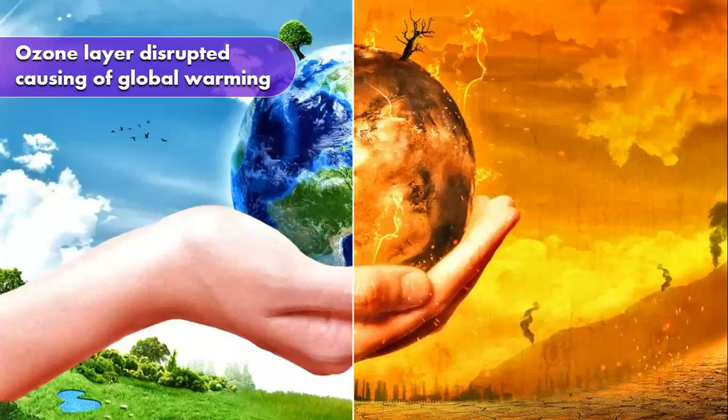We know that the present energy sources which are there in the world are creating a lot of damage and harm to the environment. One of the major effects is that the ozone layer has been depleted, and as all of us know, the ozone layer helps to block ultraviolet rays from the sun. The ozone layer has depleted because of the gases and pollution taking place. Global warming, very good Navleen beta.

Global warming is also increasing. Big glaciers in Antarctica are melting. Sea levels are rising. There are a lot of issues with the present fuels that we are using.

Tell me, which kind of fuels are we using now? Today in the world, which form of fuels are being used? They are called as fossil fuels. Very good, very good. Coal, petrol, diesel, natural gas, everything is collectively called as fossil fuels.

And when there are so many advantages of fossil fuels, we don't deny, but a major drawback is, first, they are very expensive, and second, they are exhaustible, meaning they will get finished. They are pollution causing, they are exhaustible, not inexhaustible, meaning they are non-renewable in that sense. So these conventional energy sources are not reliable for the future generation. The cost factor is also there, it's very expensive. And last but not the least, as they are non-renewable energy sources, as we keep on consuming and using them, we are depleting the existing stock.

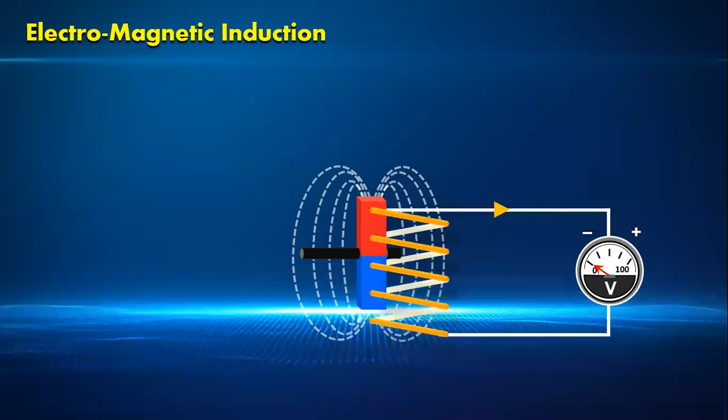What is this device? This device, what you see in front of you, is the voltmeter, meaning it is producing electricity. Very good. Now, obviously, manually no one can rotate this 24/7, because we are humans, we are bound to get tired. Hence, correct, it should be an ammeter, very good beta, to measure current. But it is also measuring the potential difference, it is just telling us how much potential difference is coming. It is understood current will also be there.

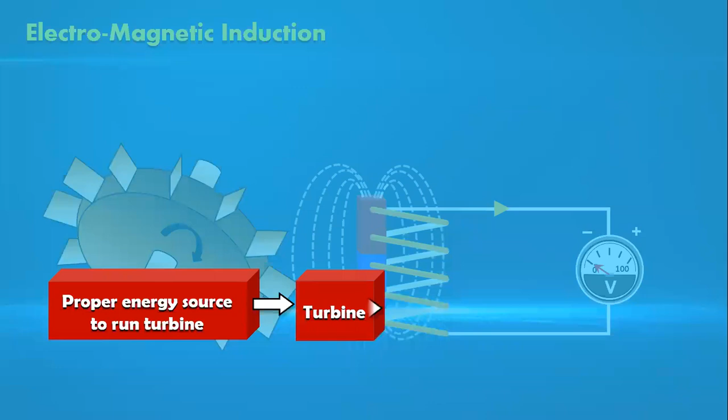Very good. So these turbines over there, obviously the flow chart, the idea is there should be some energy source to run the turbines, because rotating the turbines is important. Those turbines, once they start rotating, are connected to the generator, and once the generator starts, the electrical energy will be produced.

Now they have discussed in the first part of the chapter the thermal power plant. My aim is not to teach you the thermal power plant, we don't need to discuss that, you know everything. Tell me, this turbine which is there, which they have shown in this drawing in front of you, is this a gas turbine or is it a steam turbine?

Wonderful, wonderful. It is a steam turbine. Very good, very good. Tell me, what is the function of the boiler?

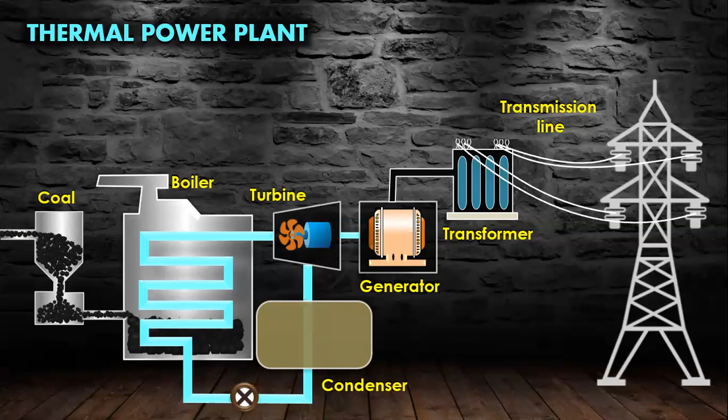What does the boiler do? It converts dash to dash. Very good, Madhura beta. It converts water into steam.

Very good, very good. So when will water get converted into steam? When it starts boiling, correct. When it crosses 100 degrees Celsius. Very good. So the moment it crosses 100 degrees Celsius, it starts boiling.

Steam will form. So this water gets heated because of that coal which is used as a fuel. And then that steam is produced, that steam is released on the turbine with full force. Turbine starts rotating, it goes into the generator, and inside the generator the coil rotates.

See, the coil can also rotate or the magnet can also rotate. Please remember, inside the generator, normally the magnets are stationary and the coil is rotating. So the transformers are connected and from the transmission line, it goes all the way to the cities.

What does the condenser do? It converts the steam back to water. Very good, very good. The steam enters into the condenser and the condenser is of course connected to some cooling tower.

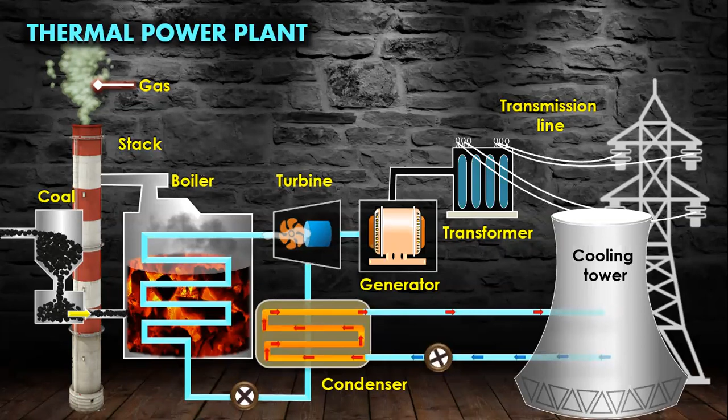Because the water is getting heated. Very good. How is that water getting heated? Why is the water in the condenser's pipes getting hot? By the steam, by the steam. Very good. The steam is falling on it. The condenser is absorbing that heat from the steam.

If the heat reduces from the steam, it will convert into water, and that hot water goes back to the cooling tower, where it gets cooled, and then it comes back again. So this way, the condenser converts steam to water.

Is the condenser opposite in function to the boiler? Tell me please, is the condenser opposite in function to the boiler? Yes, it works opposite.

Very good, very good. So this is the schematic drawing. If you haven't made so many things in the exam, they don't ask you to make such things. This drawing doesn't come, but you should remember the flow chart, the schematic drawing. This is called a schematic drawing.

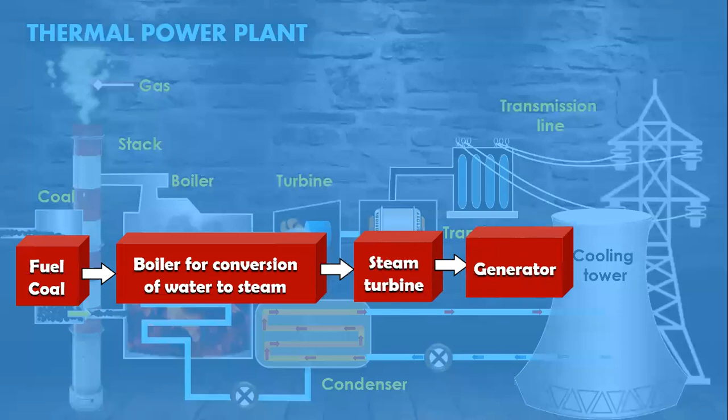The fuel, the coal, goes to the boiler for conversion of water into steam. From there, steam is released onto the steam turbine, which is then connected to the generator, and ultimately from the generator you get electrical energy. This is the whole process without drawing the actual thing. This is a flow chart.

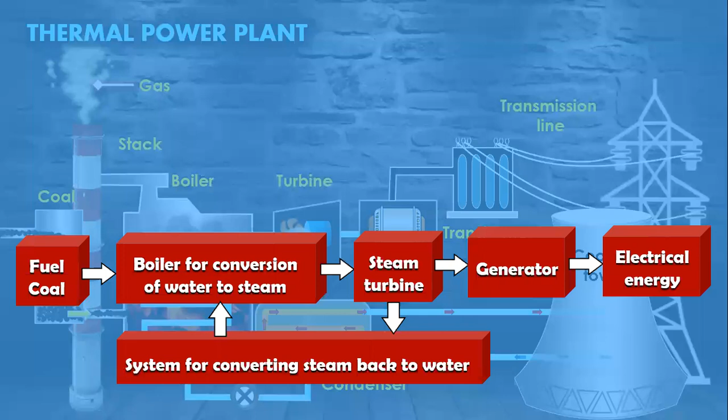Now comes the energy flow chart. This is more important, I would say. Please remember this energy flow chart properly for every power plant. Every power plant which we are going to discuss, whether it is thermal, gas, nuclear, or hydroelectric, every power plant has an energy flow chart also.

So there is chemical energy in the coal. Tell me, this chemical energy of the coal is converted to dash energy. Quickly, quickly. It is converted to thermal energy, brilliant, brilliant. Thermal energy is converted to dash energy - thermal energy into kinetic energy of steam. Very good, very good, into kinetic energy of steam. Kinetic energy of steam is converted to dash.

KE of turbines converted to electrical energy. Very good, very good.

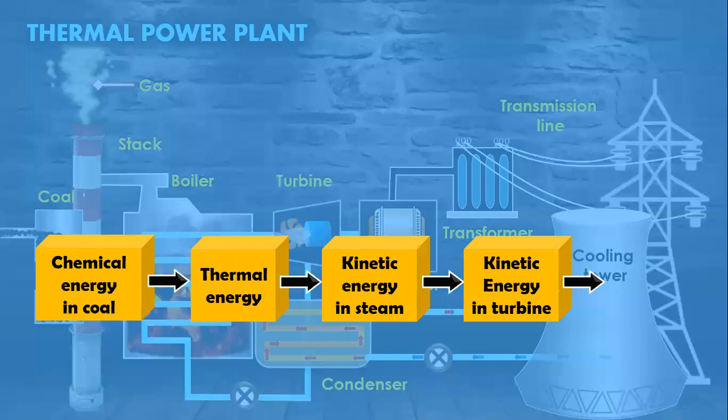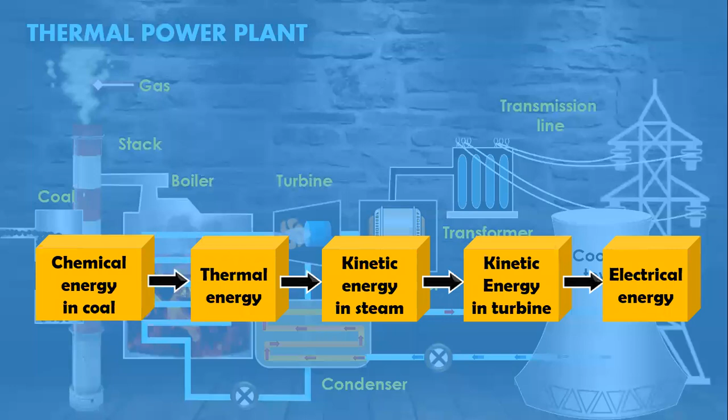You all are answering very promptly in the chat box. It shows you are thoroughly prepared, you've seen the modules, done good pre-work. This benefits both of us - you all are able to answer nicely, and I am also able to go a little quickly. Thank you so much for watching at home.

Okay, so this was the thermal power plant. But thermal power plants have drawbacks - it's a big problem. We are using it, we don't deny that. For so many years, thermal power plants have been used in every country in the world. But unfortunately, after 5-6 decades of such heavy use, today we are victims of pollution.

And because of that, there are a lot of other issues going on. If you see programs on TV, especially channels like BBC Earth or Nat Geo, there is global warming, the glaciers are melting in Antarctica, sea levels are rising, and fewer crops are growing in the world.

It's a big problem. You all are the younger generation. In the next 30-40 years, the world is for you. So at your end, you should try your best in whatever ways to reduce the effects of this thing.

But pollution is the main issue, obviously. Today asthma and so many issues are there. I feel this mask should be worn all the time, even after all this COVID jhanjat gets over. Wear a mask - you are going out on the road, you don't know how much pollution is there. So it's a big headache.

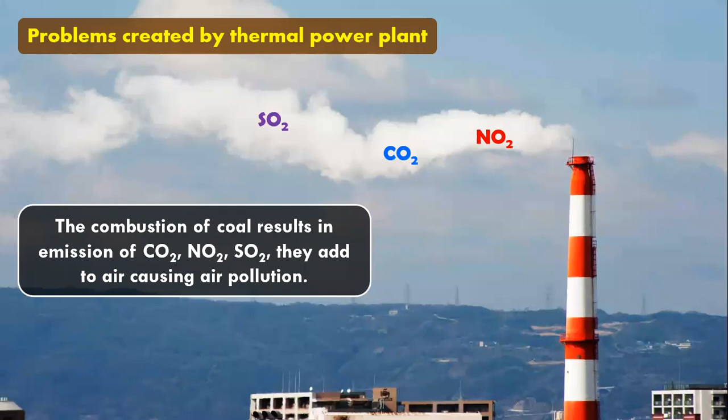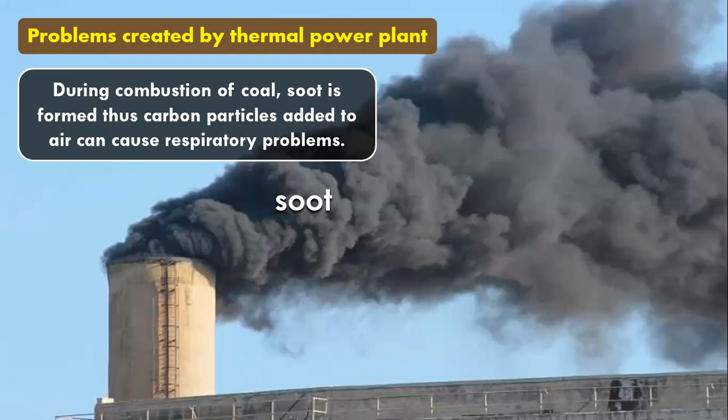Okay, so these gases are there in the atmosphere. At the same time, because of these gases, that black color smoke that you see is called soot. You must have seen photos from villages - they have that chula where they put wood, and when they burn that wood, the burning makes their utensils black, and the walls of the house also turn black. So this is called soot.

And last but not the least, there is depletion in the coal reserves. No doubt, we are exhausting it. In the last 50-60 years, so much coal has been used that wasn't used even in the 200 years before that. Scientists have seen that in the last 60 years - let's say we are in 2021, so the last 60 years would be from 1961. Between 1961 and 2021, so much coal has been used. Why do we use coal? Mostly to generate electricity, and it is also used in industries, especially steel industries.

Especially in the steel industries and iron industries, this coal is being used so much around the world that scientists calculate that between 1761 and 1961, in those 200 years, less coal was used, but between 1961 and 2021, in those 60 years, more coal has been used. So this is another problem which is there.

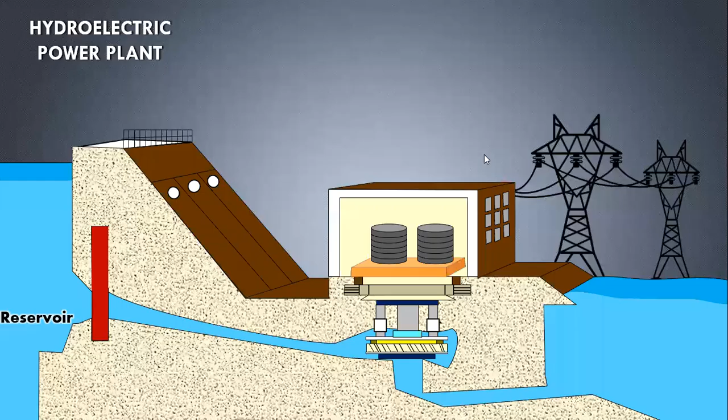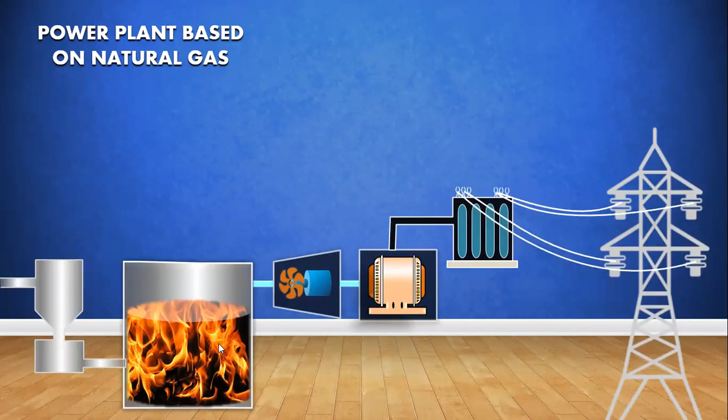So this was about thermal energy. Moving on to the next power plant which has been discussed is the power plant based on natural gas. Interestingly, India is encouraging these type of power plants. The government encourages these power plants in India and gives incentives to big industries that if they want to install a power plant, they should install a natural gas power plant. Why is the government promoting these natural gas power plants?

It's because these reserves are there in India also - not because of the pollution. These reserves are available abundantly in India. You have heard about CNG, compressed natural gas, to reduce imports.

Very good. Because when you buy from abroad, you have to pay in dollars, and when you pay in dollars, that becomes expensive for us. So that is the reason the government is encouraging this. Today you see mostly almost every rickshaw in our area is working on CNG.

Every rickshaw in our area is moving on CNG. Taxi drivers also run their taxis on CNG. You must have seen how big it is inside the trunk - have you seen a big gas cylinder is there? Have you noticed in these taxis, inside the trunk? Even now people are having this in their personal cars - yeah, red and white type.

So natural gas also has power plants. In natural gas, there is a combustion chamber, there is a gas turbine. See, this is the second turbine. First was steam turbine, second is this time it's a gas turbine. Everything else is more or less the same.

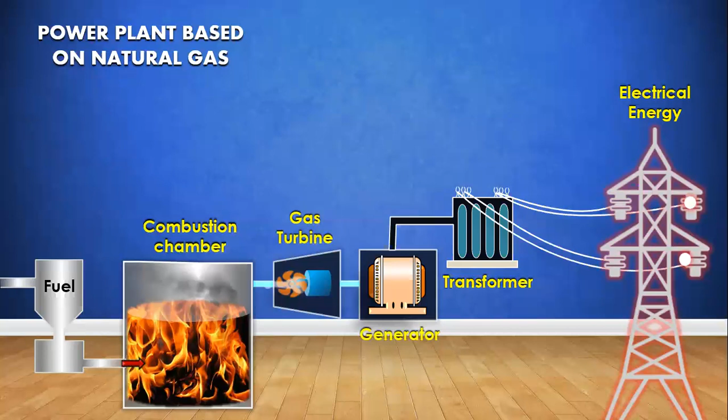Nothing complicated. Now, why is there no condenser in this? Because no water is there. Very good - water is not being used, steam is not being formed. When there is no steam, we don't want it to come back to water. So when there is no water involved, we don't use a condenser. Very good, simple policy - wherever water is involved in a thermal power plant, there we use a condenser.

So this is the flow chart in front of you about the schematic drawing of this particular power plant. Did you understand?

Okay, now this is the discussion of nuclear fission. In nuclear fission, which material, which radioactive element is used? Please tell me - in nuclear fission, you have to tell with the number. What number is uranium? Uranium has many isotopes - Uranium 235, very good, Uranium 235.

Tell me, true or false: in nuclear fission, the atom of uranium is split into two parts. True or false? It is not a true statement, it is false. Why is it false? Because the atom is not split.

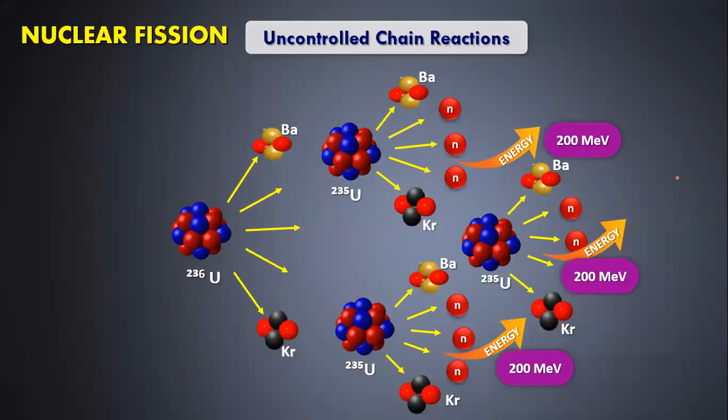So we need to slow it down. Which rods? Boron, and there's one more rod too. Boron and cadmium. What is special about them?

What is the special thing about them? Why are they so special? They absorb the neutrons - if not all, most of the neutrons.

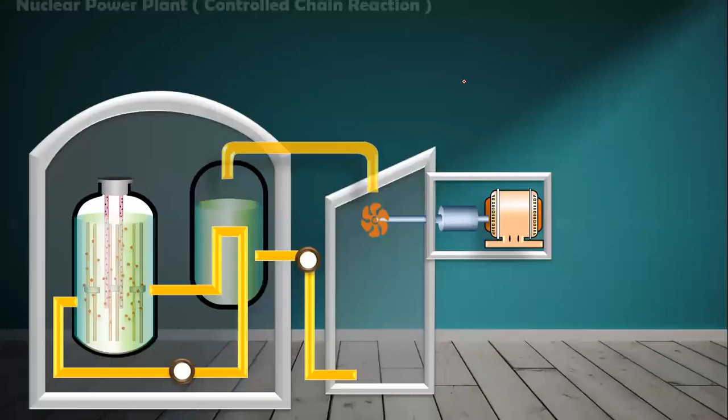And when they absorb the neutrons, very few neutrons will be permitted to carry on forward, and in this way the speed of the reaction will reduce a bit, and when it reduces, this becomes a controlled chain reaction. Very good. Now controlled chain reaction is used in a nuclear power plant.

This is there in front of you. There is a nuclear reactor, a boiler, everything is the same. Here there is water. Will there be a condenser here? Yes, because water is there. Inside that boiler, you can see there is water. So a condenser setup is also there.

There's a turbine, a generator, everything is there. Now that nuclear reactor, which is on the extreme left, that nuclear reactor actually includes 3 sub-parts. The nuclear reactor has a moderator, it has the fuel rods - meaning uranium, and it also has the boron or cadmium rods. Each one of them has its own role to play.

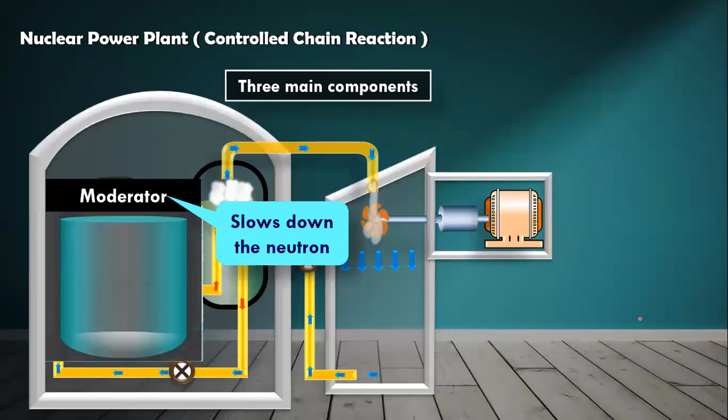Inside the nuclear reactor, there is a moderator. It slows down - moderate means to balance it a bit, slow it down a bit. It was very fast, so it was slowed down a little, so that the reaction can take place properly.

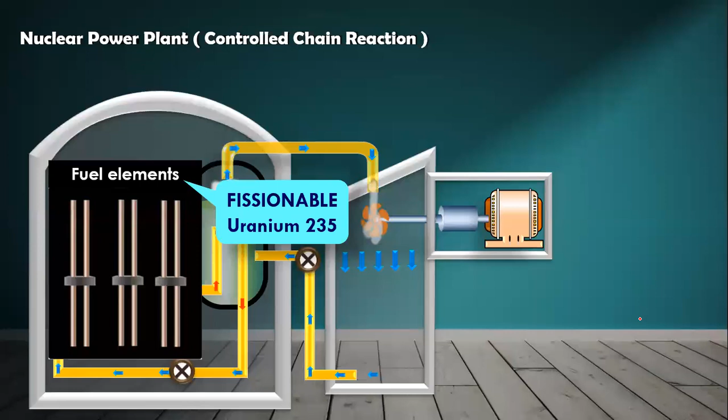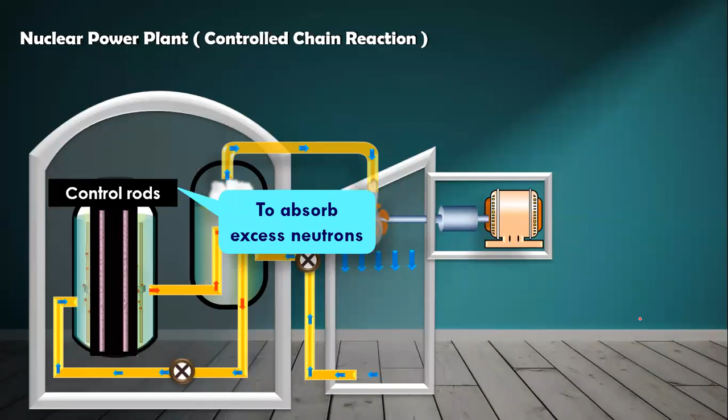Then is the fuel element which is fissionable - what is going to break - that is uranium-235, what is going to split. And then there are the control rods, you know the name - control rods include boron and cadmium. So these are the control rods over here.

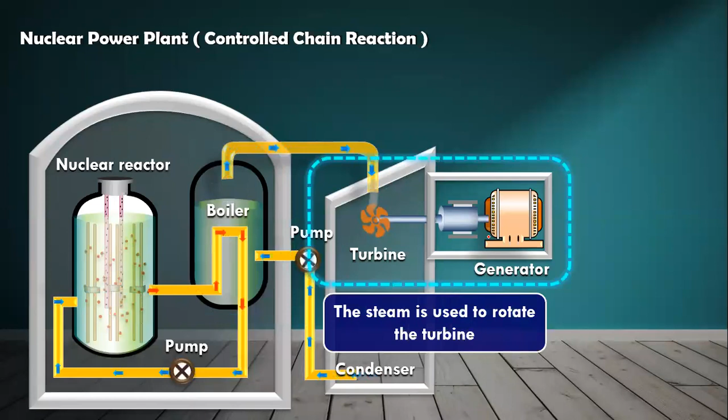Now, after that is the boiler. You know the story, I'm not going into the boiler, I'm passing on quickly. The boiler heats the water, steam is formed. Steam goes into the turbines. Turbines will rotate. The moment the turbine starts rotating, the armature coil in the generator will start rotating, which is between the two magnets. Remember, the armature coil rotates, the magnets stay in their place, they don't move, so the armature coil also rotates and ultimately electricity is produced.

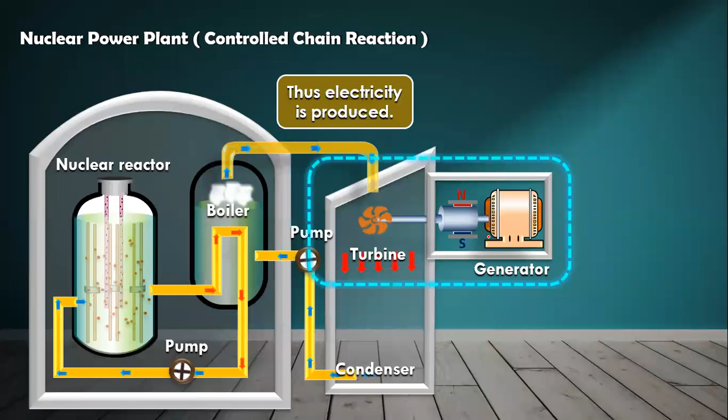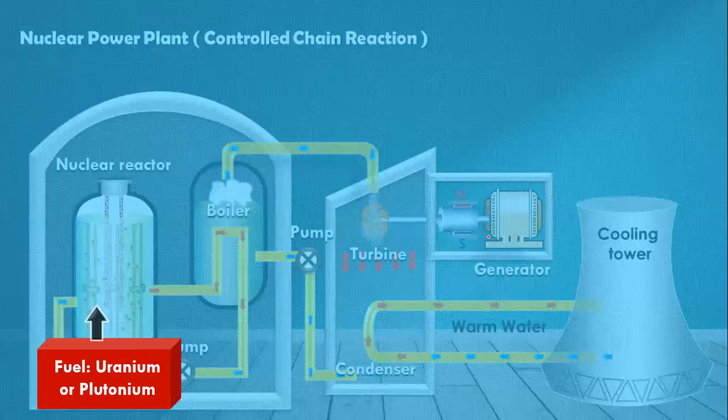You already understand the role of the condenser, so I am not talking about it. This is the nuclear power plant. This is the schematic representation of the same power plant, and this is nothing new for you - you already know all this. There is a condenser setup also, so we can find a system for conversion of steam back into water.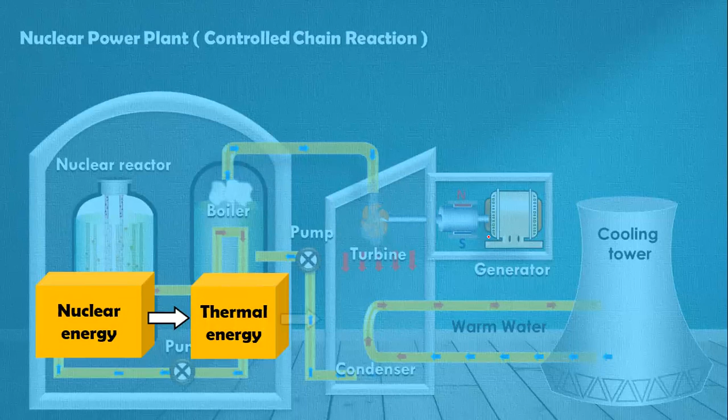Thermal - very good. After thermal energy, which is the next step? Very good, after thermal energy comes KE of steam. Very good, KE of steam. After KE of steam comes KE of turbine, and after the KE of turbine, finally you have electrical energy.

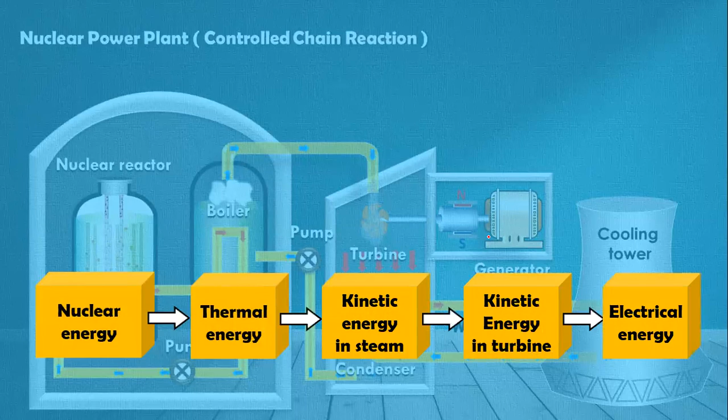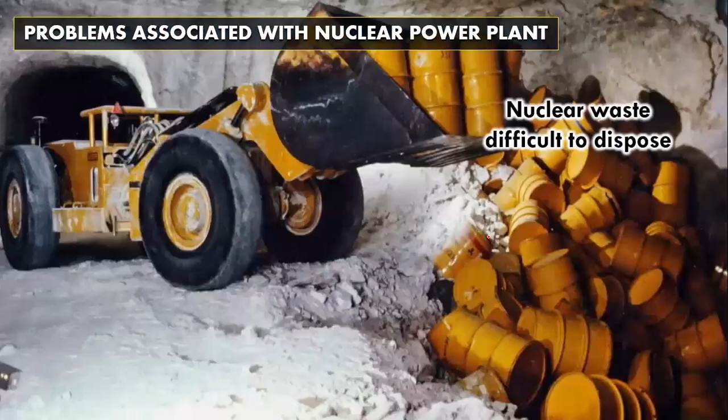Now this nuclear energy is a good source and a good way of generating electricity, but it is highly risky. Its major headache is how to dispose of the radioactive waste, which is also called nuclear waste. These harmful radiations can enter the soil, and through that they can enter the vegetation and the plants, and through that they can enter the body of humans or animals which eat those plants, and it's a big problem. Yes, radioactivity is very risky for individuals.

It's very problematic. So how to dispose of this nuclear waste is the big challenge. And God forbid if an accident happens, as it has happened in Chernobyl in Ukraine. That's a big problem. Fortunately, after that, nothing has happened in any other place, but it is very risky. Plus, every country does not have the uranium required for this reaction, and those who have it are not willing to share it quickly.

So this nuclear reactor is used, I'm not saying it's not used, but to a lesser extent. Okay, so this is the particular discussion over there. All right, so this was about nuclear reactor.

Now moving ahead, we come to the last part, which I would say is about hydroelectric power plant. Can you see my screen? Is my screen visible to you? Can you see the hydroelectric power plant? Okay, all right. The hydroelectric power plant structure is in front of you.

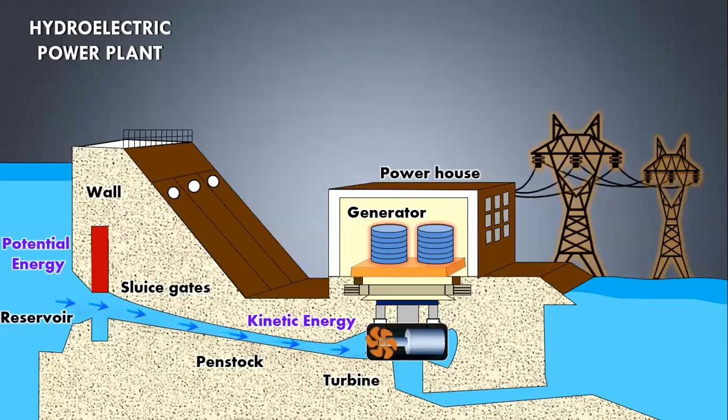The same story repeats itself: generator, powerhouse. Now tell me, what is this turbine called? Is it a steam turbine? Is it a gas turbine? Which turbine is this one? Yes, this is the third one. This is called a water turbine. Brilliant, very good. So remember, you have steam turbine, you have gas turbine, and this is a water turbine.

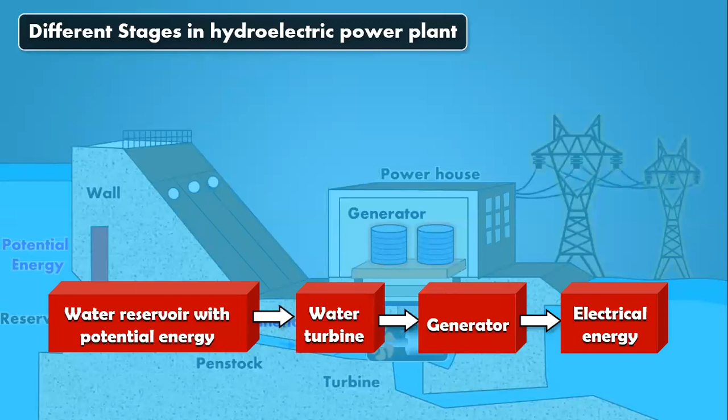So these are the different stages in the hydroelectric power plant's generation. Water from the reservoir falls on the water turbine. Water turbines are connected to the generators, and generators ultimately give you electrical energy.

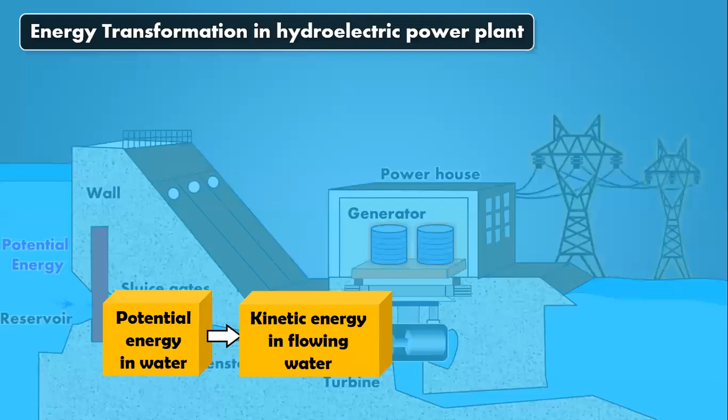Energy transformation: tell me, potential energy of water is converted to dash. Potential energy of the water is converted to dash. KE, yes, it is converted to kinetic energy of the flowing water, which is converted to kinetic energy in the turbine, and ultimately from there you are getting electrical energy.

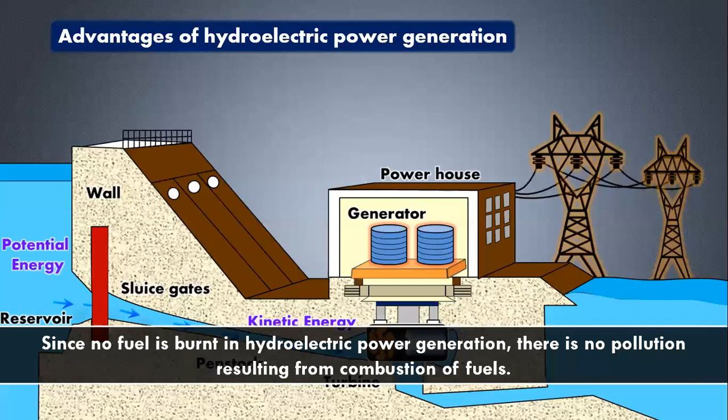No doubt the advantage is it's a very clean source of energy, meaning the electricity produced from this is very clean. You can get year-long electricity as long as water is available in the dam. And in case the water level comes down, then in the monsoon season it can be replenished, meaning it can be filled back again naturally. We are not filling it; God has made that arrangement that it will be filled again.

But of course, everything is not 100% good. When there are pros, there are some cons also, some drawbacks also. The major drawback is that when the reservoir is made, it is made over a very large area, meaning large areas get submerged. And not only the area, the people's houses get submerged, that is understood. But along with that, their fields, their agriculture that they used to farm, everything, all the plants, the entire ecology there gets destroyed.

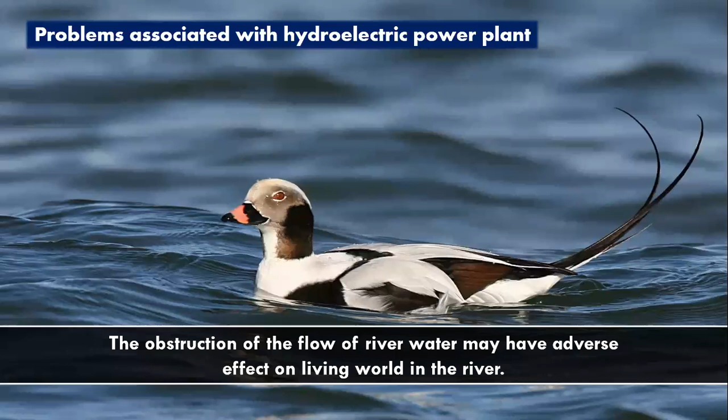Then people have to be evacuated, shifted to another place, given new homes, that is also a cost factor. And of course, the aquatic life is affected as the river gets blocked. So it has its other issues also. Okay, so this is about the hydroelectric power plant. Did you understand?

After this, the renewable energy sources start. We have very less time, so I'll just speak about wind energy. Wind energy is nothing but kinetic energy being used. The wind starts blowing and hits these windmills.

There are blades connected to a central structure called a shaft. That shaft is connected to the armature, which is placed between the north and south pole. Together they are called the generator. Remember, the generator is a combination of the magnets plus the armature.

Both together make the generator, remember. As the shaft and blades rotate, the armature also rotates. This is the terminal connection. This is the internal structure - the blades are connected to shafts, which are rods. In between there is a gearbox and a generator, which is the main part actually.

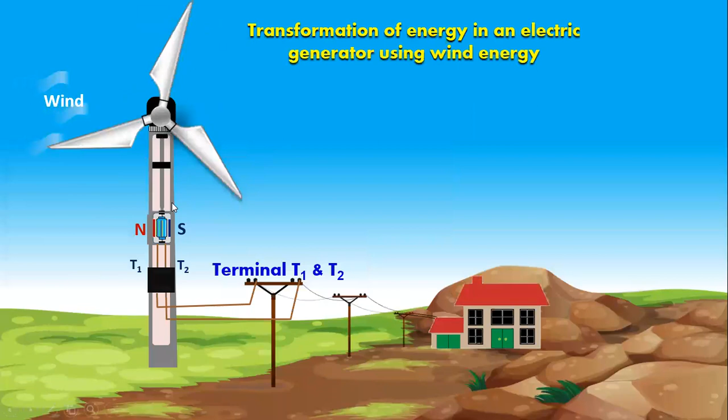Sometimes the generator is in the top part, as you can see it is right at the top. Sometimes it is in the central part, like this tower where it is in the middle portion. And here it is in the back part of the windmill. It depends - if the tower is short, like this one, they keep the generator on top, behind the blades.

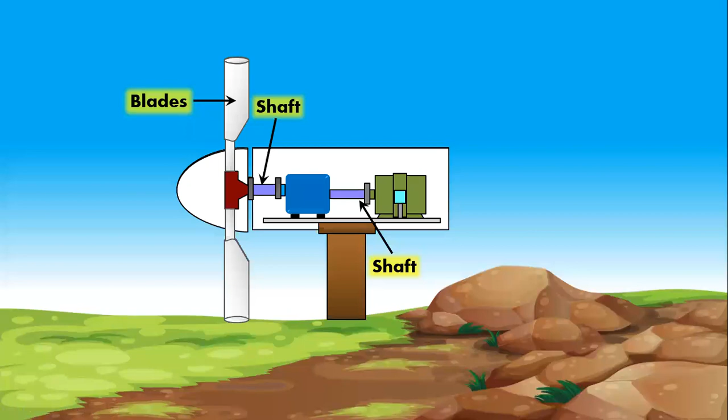Bearings are also there. Why? These bearings help this structure turn a little bit. If wind is coming from a different direction, they remotely control it to turn in that direction using the bearings.

Bearings are used wherever turning is needed. In our cycle wheels there are also bearings. Motorcycle wheels, scooter wheels also have bearings - used for turning smoothly. Anyway, this is a support structure.

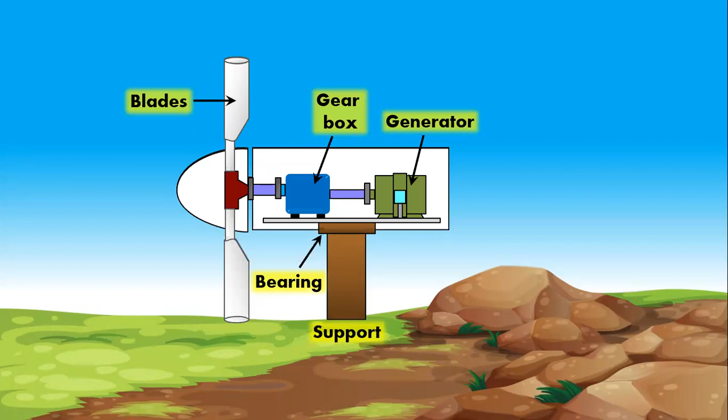Now this is a little short type of windmill. Otherwise, windmills are usually very tall to get maximum wind without obstruction. So this is how things move - as the wind comes, the blades start rotating, and as soon as the blades rotate, electricity is produced. So this is a windmill.

This is called a wind farm. When many windmills are gathered together at one place, it's called a wind farm. So this is how wind energy is produced.

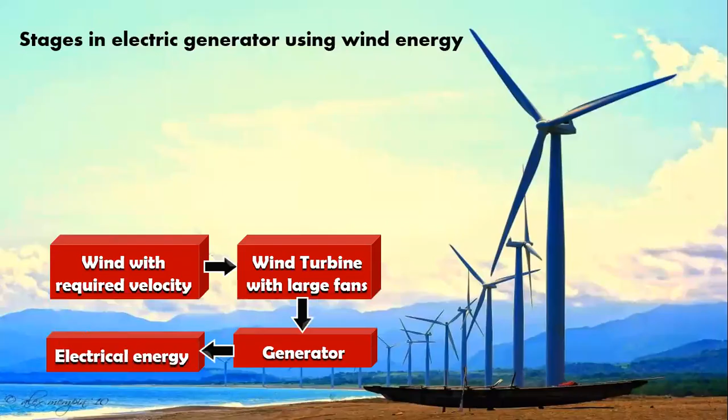Then after this, kinetic energy of the wind - this is the flow chart. Kinetic energy in the wind is converted to kinetic energy in the turbine. Which turbine is this now? Is it a steam turbine, gas turbine, water turbine? No, this is the fourth type - this is a wind turbine.

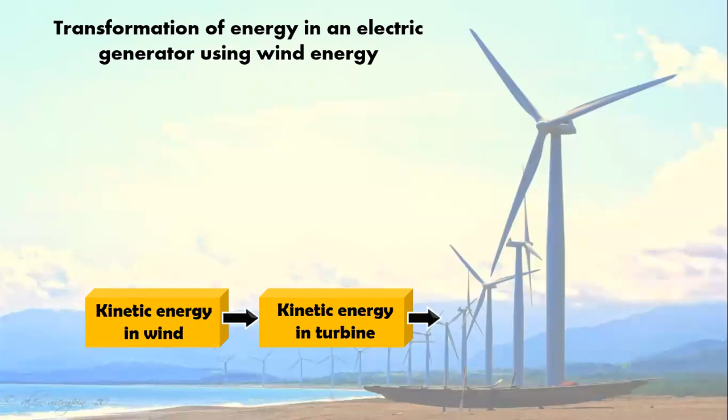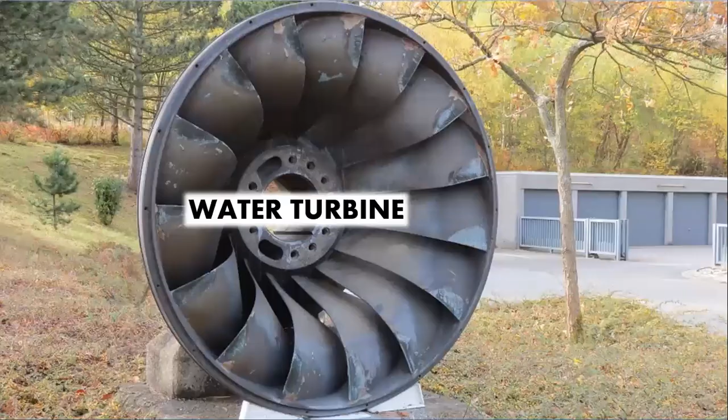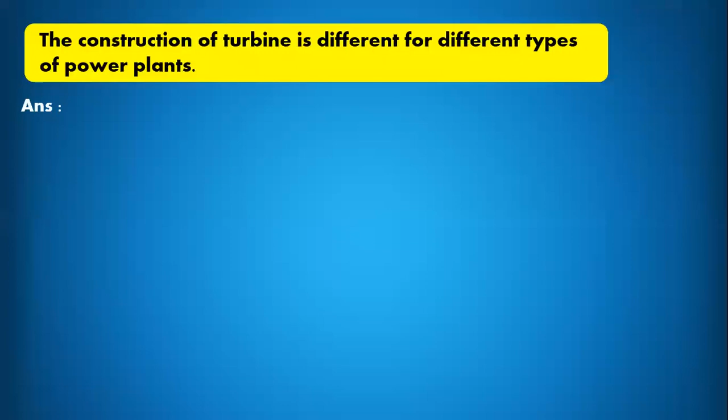Remember, in this chapter we are speaking about 4 different types of turbines. So these are different ways turbines are designed. There's a water turbine - its blades look different. Pay attention, scientists design these and calculate carefully. Water turbine blades are a different shape, and steam turbines have small cuts in their blades. So these are different types of turbines depending on which power plant they will be used in.

Now after this there is only the photovoltaic cell, so you can manage that on your own. I hope you will read it.